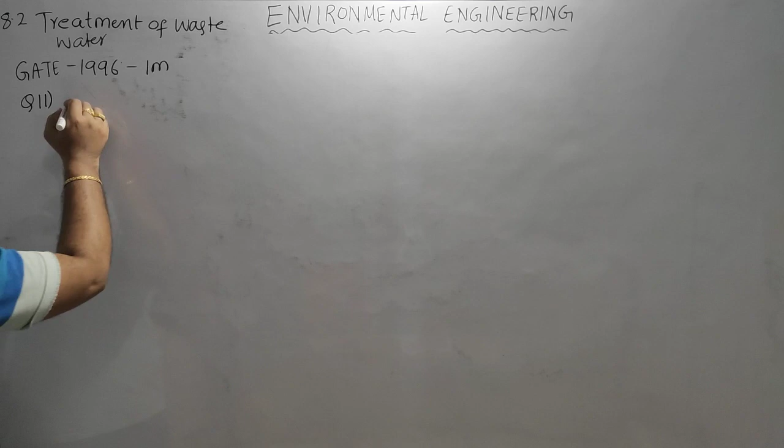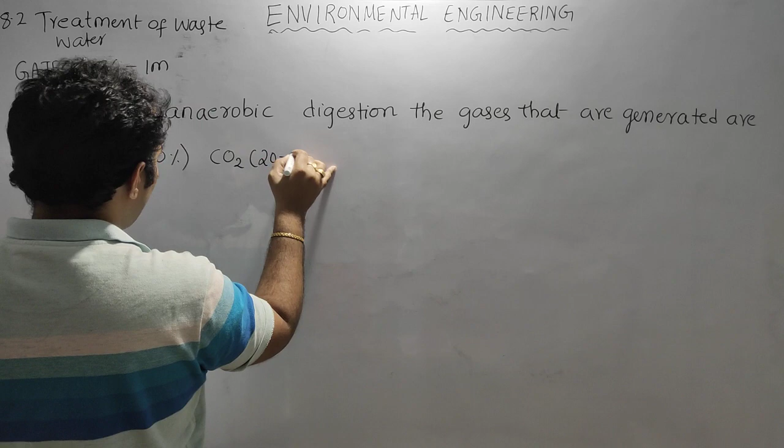Let us discuss question number 11, GATE 1996, 1 mark. The question is: the main constituents of gas generated during the anaerobic digestion of sewage sludge. So during anaerobic digestion, the gases that are generated are CH4, which is 70%, and CO2 20 to 30%, and H2S and other gases in traces. This is what we have learnt.

So from the options: carbon dioxide and methane; methane and ethane - second option is wrong; carbon dioxide and carbon monoxide - also wrong; carbon monoxide and nitrogen - also wrong. So the option is carbon dioxide and methane. That is the answer for question number 11.

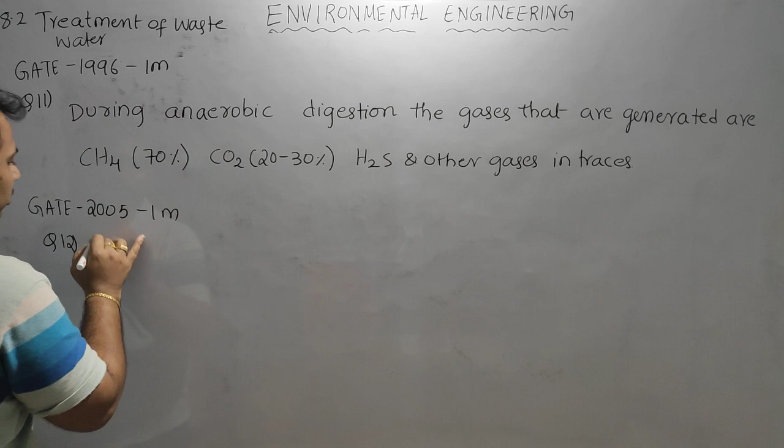Question number 12, GATE 2005, 1 mark question. In aerobic environment, the nitrogenous organic matter will convert into... Here, in aerobic environment, we generally assume we will be having plenty of oxygen available.

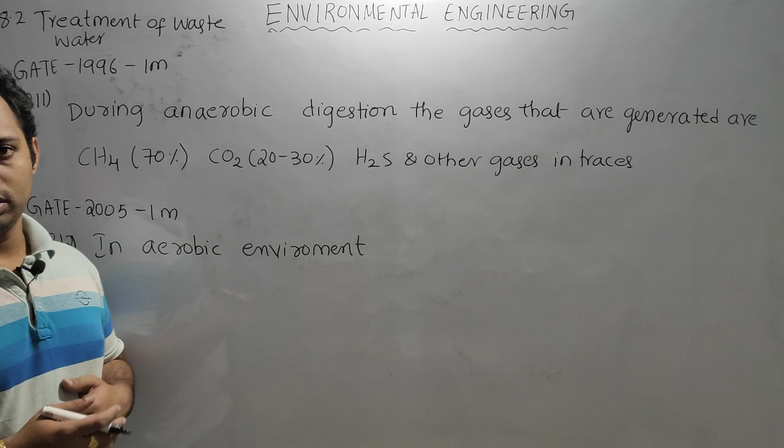So whatever compound forms will be stable compounds. During aerobic decomposition, stable compounds will form, meaning they are completely neutralized - they don't carry any kind of charge. So if you look at the options, except A and C, the rest carry a negatively charged compound in them, so B and D we can eliminate.

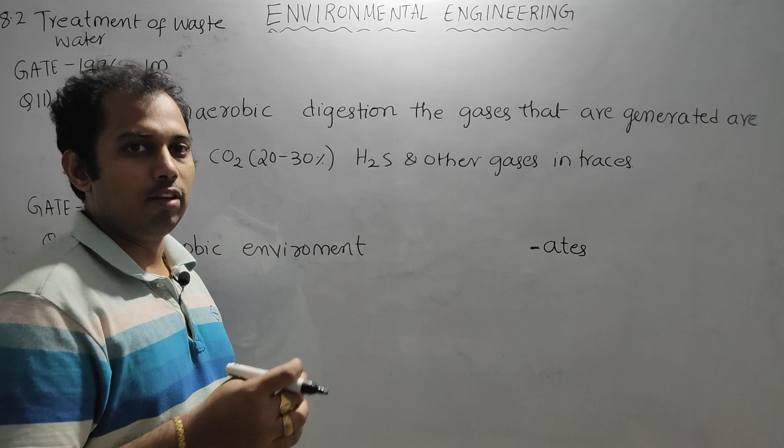Looking at A and C, here oxygen is plenty, so the end products will have an extension called 'ATE'. When we have plenty of oxygen, the compounds will form in terms of ATE: nitrite means oxygen deficiency, nitrate means oxygen is sufficient; sulfite means oxygen is deficient, sulfate means oxygen is sufficient. So ATE means oxygen is plenty. So in the options we look where oxygen is plenty.

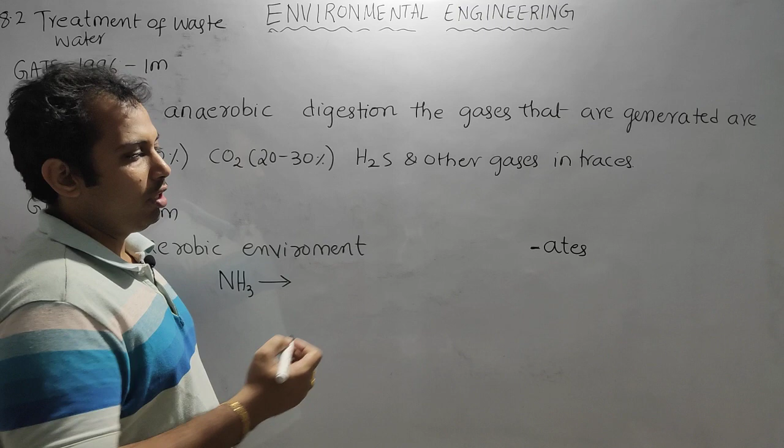If you look at the first option, it is ammonia to nitrate. In an aerobic environment, free ammonia NH3 as the organic matter will be converted into a stable organic matter. That is what we have learned - free ammonia will become albuminoid nitrogen. We discussed albuminoid nitrogen in water supply. It will become albuminoid or organic nitrogen.

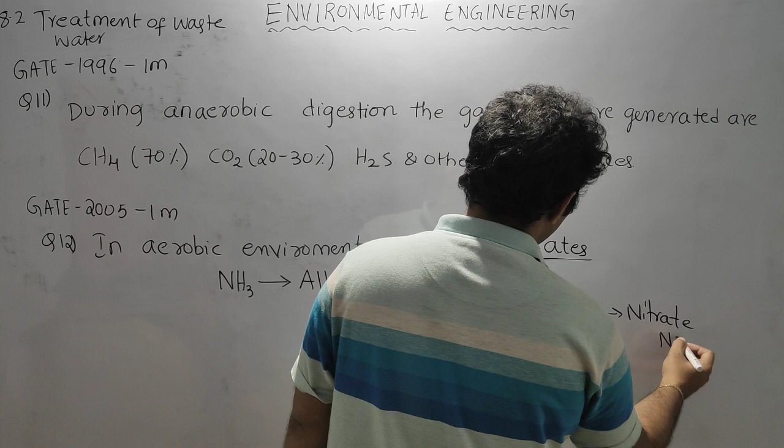And then it will convert into nitrite, and last it will convert into nitrate. So nitrate is nothing but NO3, NO3 is nothing but nitrate. So the answer is: free ammonia will convert into nitrates. That is the answer for question number 12.

Question number 13, GATE 1992, 1 mark question. Trickling filters are used to remove - generally trickling filter is a secondary treatment unit. We use the secondary treatment unit to remove the organic matter, not the suspended solids, not the colloidal solids. Suspended and colloidal solids will be removed in the settling tanks, not in the secondary treatment units. Secondary treatment units generally reduce the organic matter with the help of bacteria or microorganisms.

So that is why in a trickling filter, what we remove is the organic matter. So organic matter is the answer.

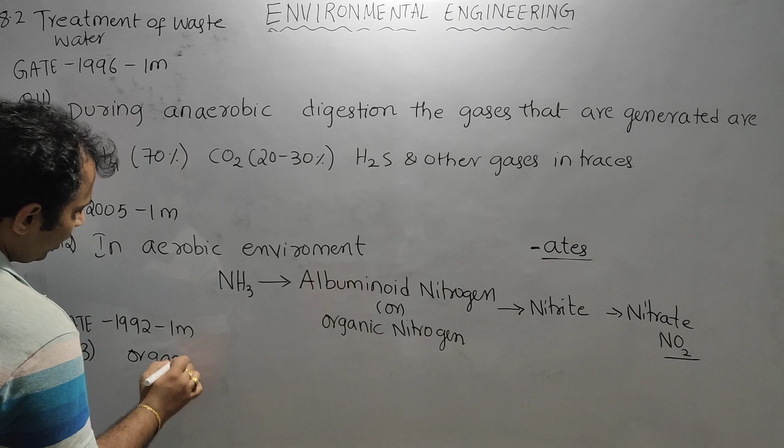Let us discuss the next question. Question number 14, GATE 1995, 1 mark. Let us read the question: a trickling filter is primarily...

First option, straining process to remove the suspended solids from sewage. B, biological oxidation process to remove BOD from sewage. Option C, straining process to remove turbidity. Option D, straining process to remove bacteria from the water.

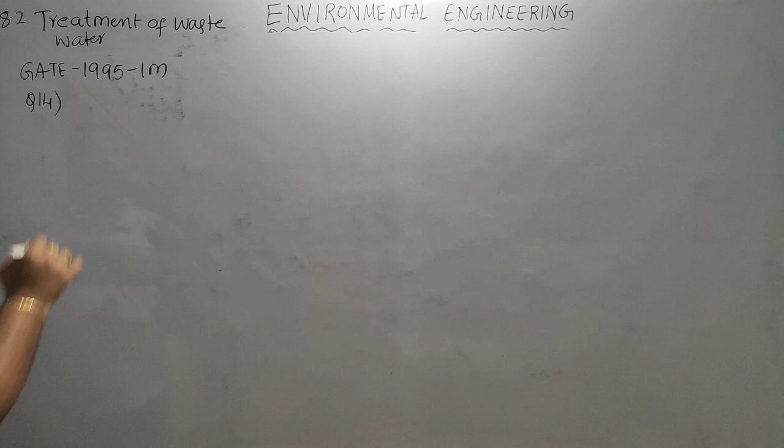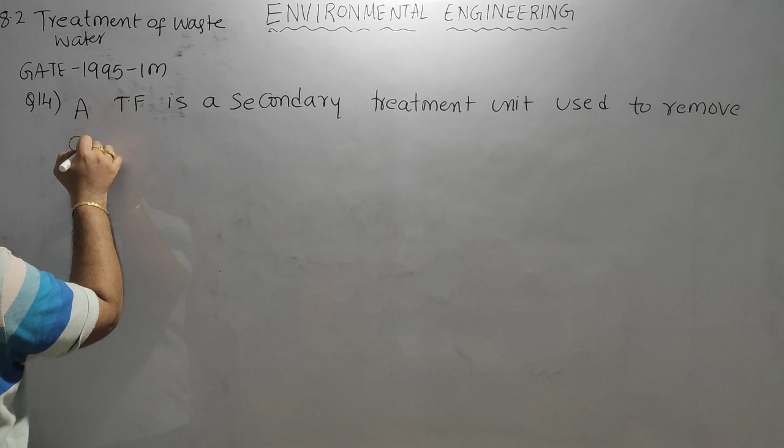So, trickling filter is a secondary treatment unit. A trickling filter is a secondary treatment unit used to remove organic matter, or BOD, with the help of microorganisms or with the help of aerobic bacteria, with the help of aerobic microorganisms - that is the work of the trickling filter.

So it is a biological oxidation process to remove BOD from sewage. That is the answer.

Question number 15, GATE 1996, 1 mark question. The removal of dissolved organic matter occurs in...

Option A, slow sand filter. Option B, trickling filter. Option C, rapid sand filter. Option D, dual media filter.

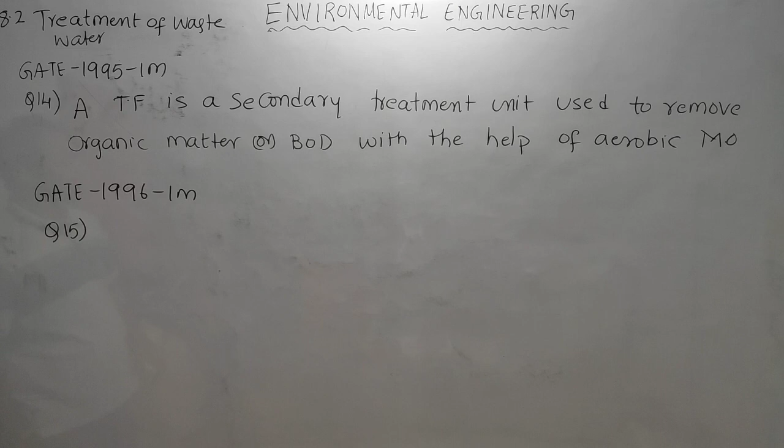See, the three filters we are seeing, slow sand, rapid sand and dual media filter. They are used to remove colloidal and dissolved particles, but the organic matter which is in soluble form, I told you, in secondary treatment...

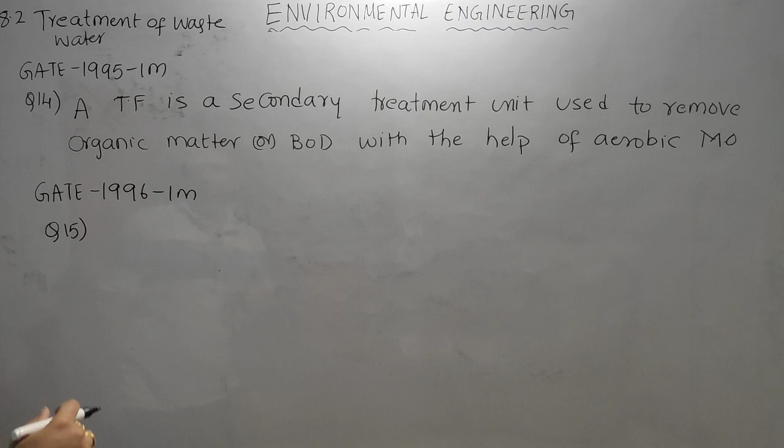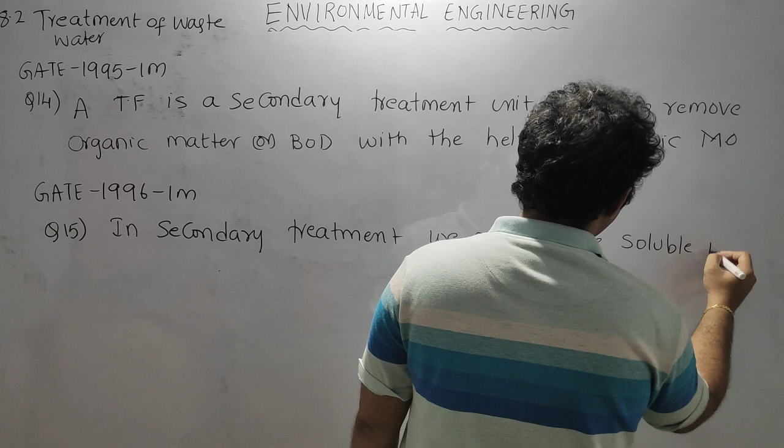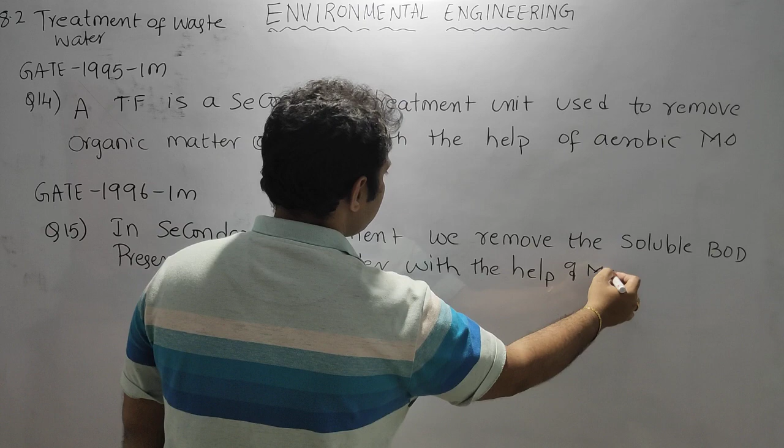In secondary treatment, we remove the soluble, means dissolved, BOD present in wastewater with the help of microorganisms. So generally we remove the soluble BOD. Soluble means dissolved organic matter.

So if you look at the options, all three, slow sand, dual media and rapid sand, they remove colloidal particles, or some kind of dissolved particles which are inorganic in nature. Organic matter they cannot act on directly. They will remove it to some extent, but trickling filter is a device dedicatedly working on removal of organic matter.

So that is question number 15. Question number 16, GATE 2002, 1 mark question.

A trickling filter is designed to remove. Here also the same question. Settleable solids, colloidal solids will be removed in the normal filter or in the sedimentation tanks, but dissolved organic matter is removed in trickling filter.

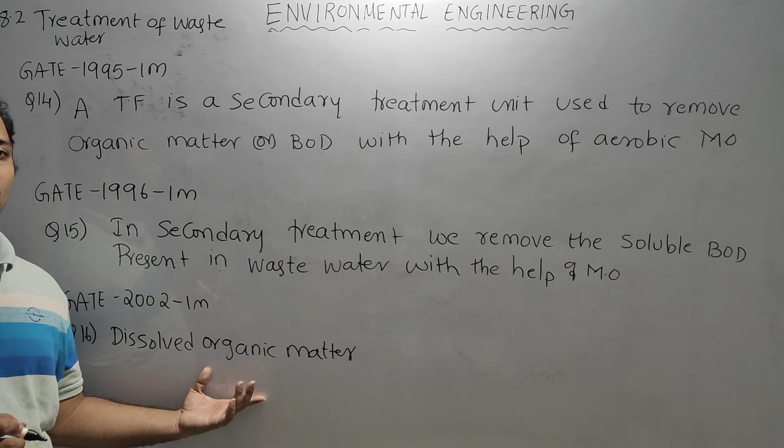So here the same question is repeated. Dissolved organic matter is removed in trickling filters. Not only trickling filter, it may be activated sludge process, sludge digestion tank, or any secondary treatment. All secondary treatment works on reducing the dissolved organic matter. That is the work that happens in secondary treatment of wastewater.

Okay, so let us go to the next question. Question number 17, GATE 2003, 1 mark question.

The question is: which of the following sewage treatment methods has inherent problems of odor, ponding and fly nuisance? These are the operational problems given. What are the three operational problems? Odor, ponding and fly nuisance.

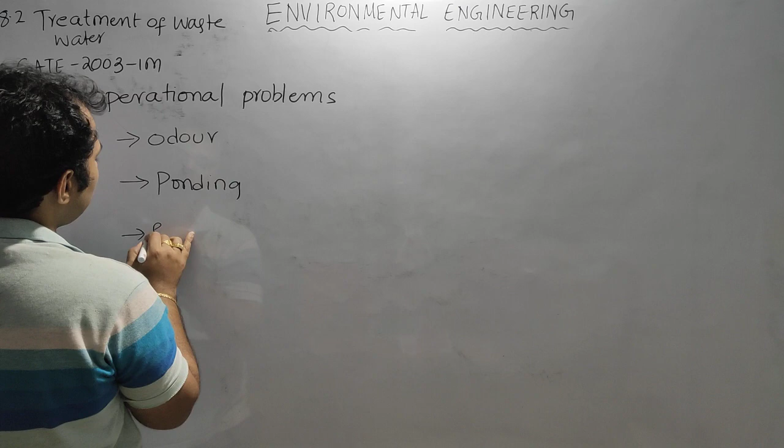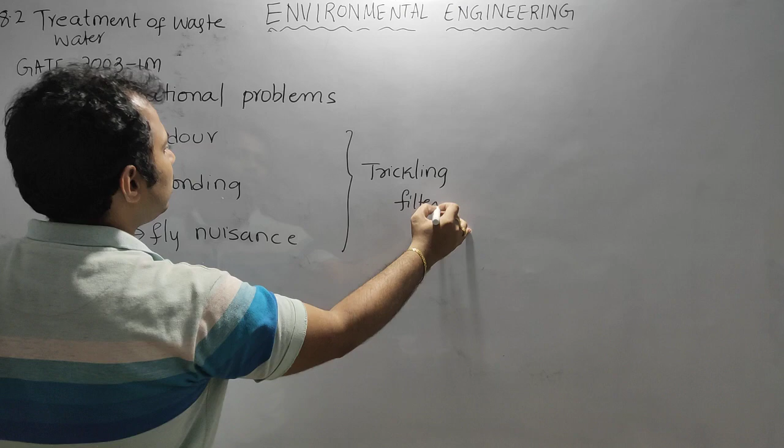So to which treatment unit have we discussed these three operational problems? We have discussed this for trickling filter. So these are the operational problems of trickling filter. So option C is the answer.

Question number 18, GATE 2014, 1 mark, set 1. The question is: the amount of CO2 generated in kg while completely oxidizing 1 kg of CH4 to the end product.

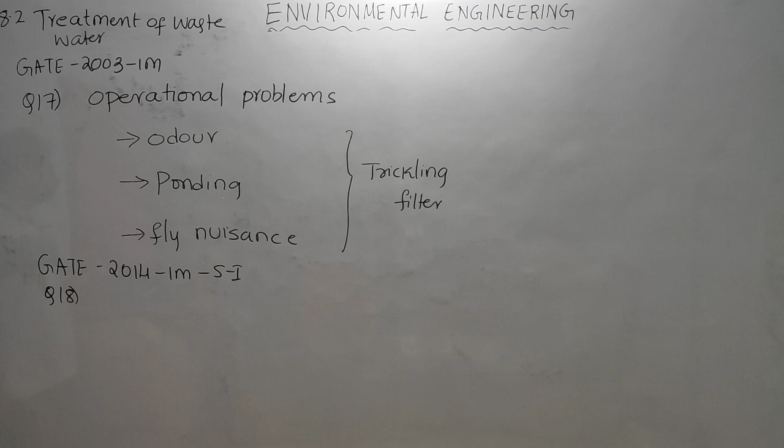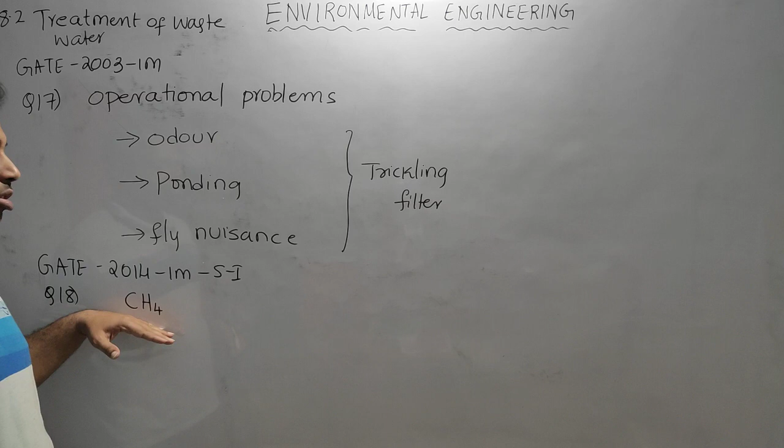So here we are oxidizing CH4 to its end products. Generally, in the absence of oxygen we have generated CH4, so it has oxygen deficiency. That's why it's combustible, because it still needs oxygen, which is why it has energy value. If it were completely filled with oxygen, the energy value would go down. So it has a deficiency of oxygen, it needs oxygen, it is oxidizable. So if you give oxygen to it, it becomes CO2 plus 2H2O.

Here 2 moles of oxygen is needed. Now what is he asking? He is asking what is the total weight of CO2 generated in kg when 1 kg of CH4 is oxidized.

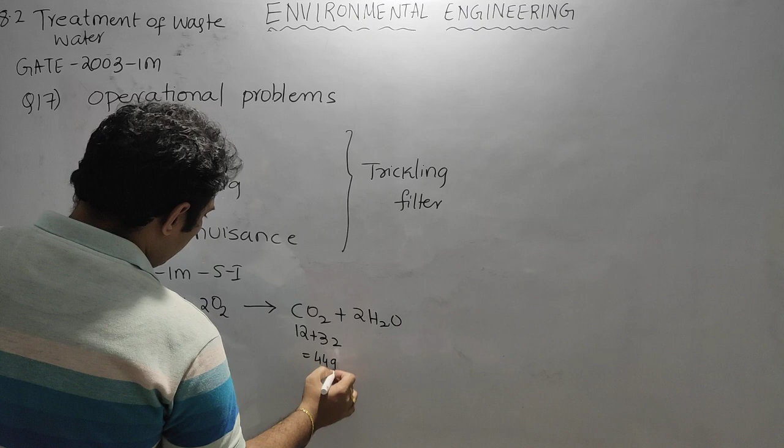What is the molecular weight of CH4? C12 plus H4, that is 16 gram. So 1 mole is 16 gram. 16 gram will give how many grams? 12 plus oxygen 16 into 2, that is 32, so total 44.

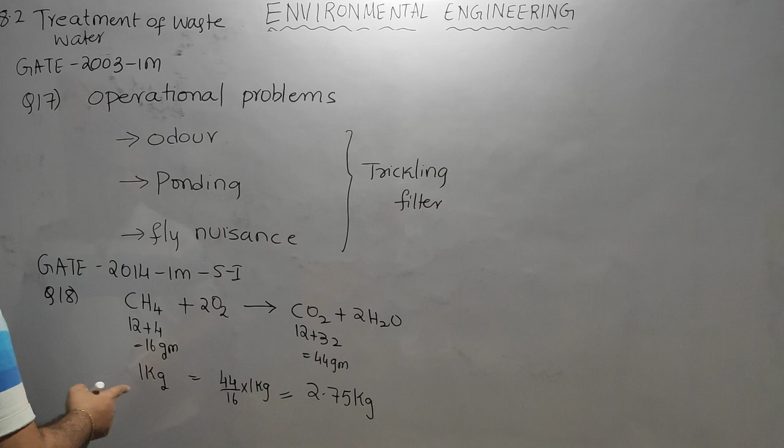So 16 gram is giving 44 gram. So 1 kg will give 44 by 16 into 1 kg. This is the amount of CO2 that will be generated, which is equal to 2.75 kg. For 16 gram we generate 44 gram, for 1 gram 44 by 16, for 1 kg, 44 by 16 into 1 kg, that is 2.75 kg. That is the answer.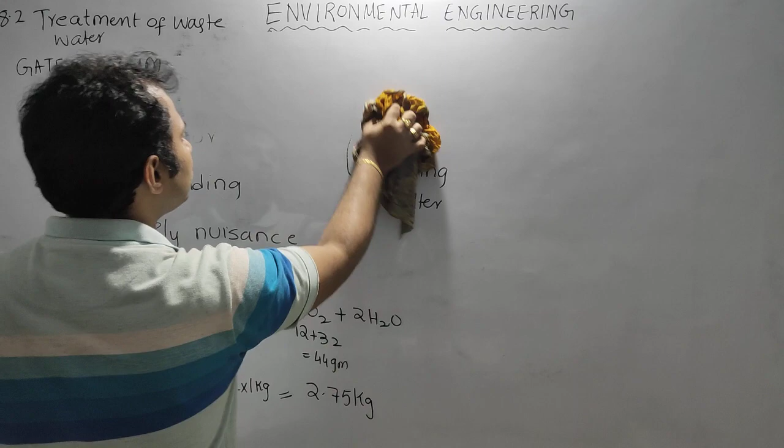Next is question number 19, GATE 2019, 2 marks, set 1. These are all very simple, small questions.

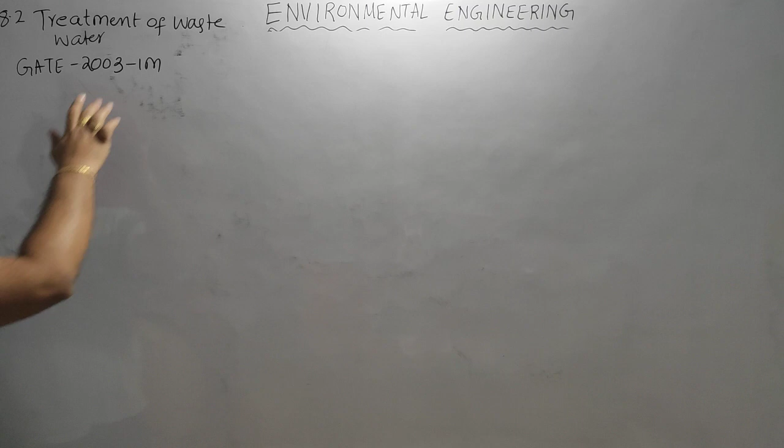GATE 2019, 2 marks, set 1. A 0.8 meter deep bed of a sand filter, length 4 meter and width 3 meter, is made of uniform particles. Diameter is 0.40 mm, specific gravity is 2.65, shape factor is 0.85, with bed porosity 0.4.

The bed has to be backwashed at a flow rate of 3.6 meter cube per minute. During backwashing, the terminal settling velocity of the sand particle is 0.05 meter per second. Find the expanded bed depth in meter. This is actually a question relevant to rapid sand filter, but it came here. Anyway, let us solve this here itself. So what is the given data?

Bed depth, length and width are given. L is equal to 4 meter and width is 3 meter. Depth is 0.8 meter, and the diameter of the particles D is equal to 0.40 mm.

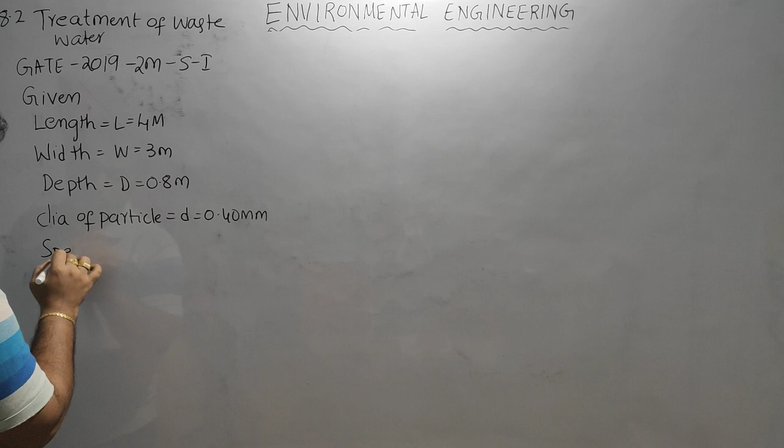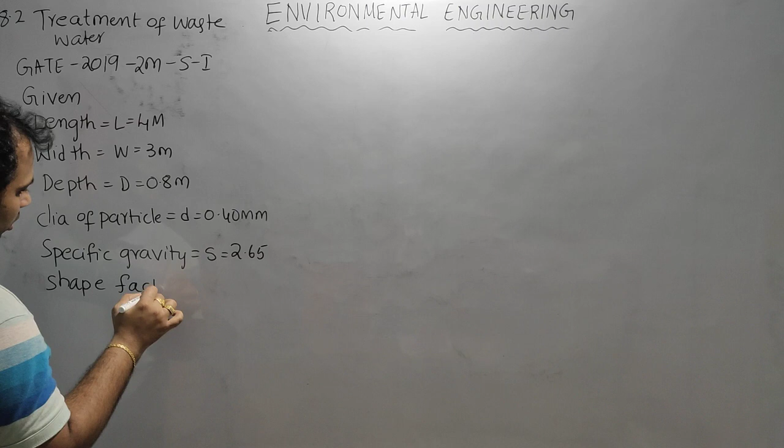D is equal to 0.40 mm. Specific gravity S is equal to 2.65, shape factor phi is equal to 0.85, and bed porosity n is equal to 0.4.

The bed has to be backwashed at a flow rate, so that is the flow rate of backwashing, QB, which is equal to 3.60 meter cube per minute.

During the backwashing, the terminal settling velocity was given. So Vs is equal to 0.05 meter per second. This is Vs.

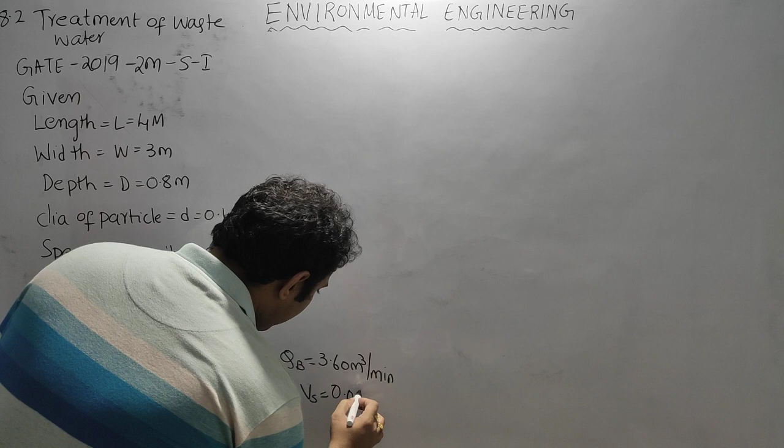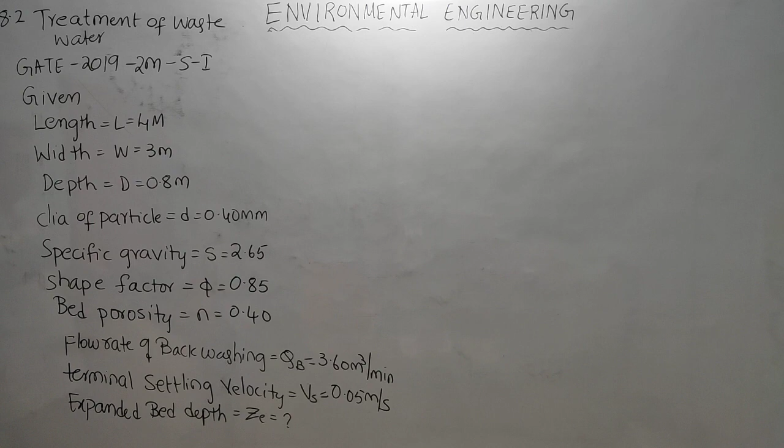Now, what is the expanded bed depth he is asking? Expanded bed depth, that is ZE, is how much? So first of all we need the expanded bed depth. If you know the normal bed depth, we have already learnt this in our rapid sand filter.

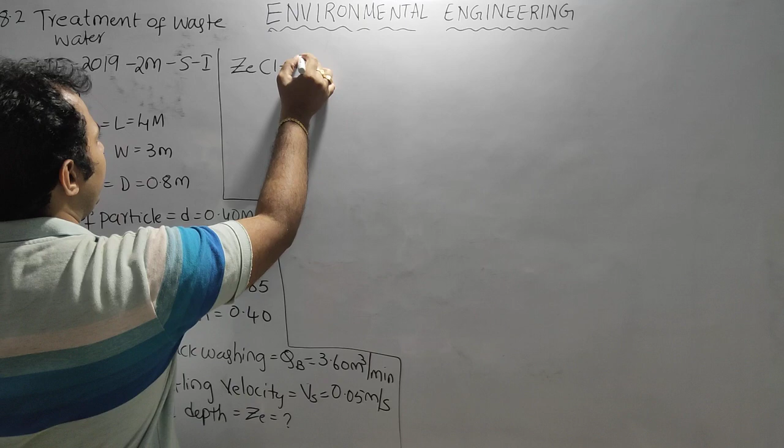There is a relationship we have derived, that is ZE into 1 minus NE is equal to Z into 1 minus N. This relationship we derived in the rapid sand filter topic of water supply engineering. So now he is asking ZE, so ZE is equal to Z into 1 minus N by 1 minus NE.

So if you look at the depth of the bed, the depth of the bed was given, so this is nothing but Z. Porosity is given, so we want only the expanded bed porosity. So now, what is the formula to find the expanded bed porosity?

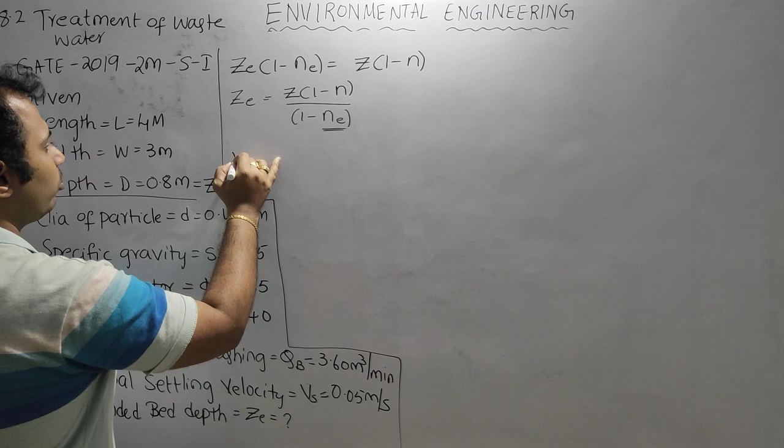There is a formula I have told you. Expanded bed porosity is equal to VB by Vs, whole to the power of 0.22. This formula we have learnt, where Vs is terminal settling velocity, which is already given, equal to 0.05 meter per second.

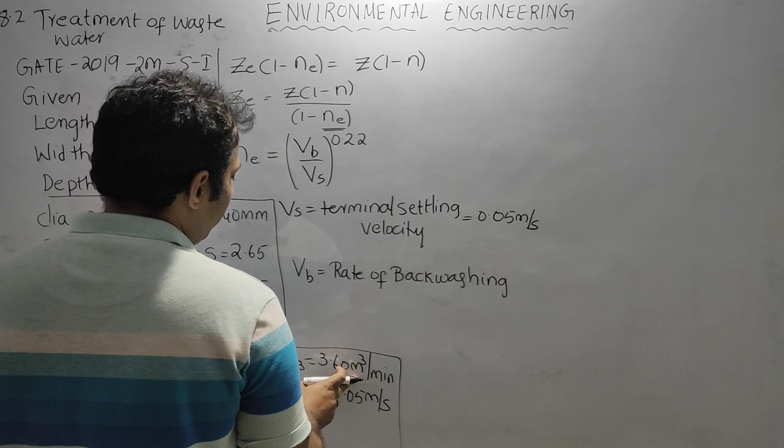So Vs is there, so we want Vb. Vb is nothing but the rate of backwashing. So if I divide it by surface area, then I will get the rate of backwash, or backwashing velocity, or velocity of backwashing.

This velocity of backwashing is nothing but Q by surface area, which is Q by B into L. Q is 3.60 meter cube per minute, converted into seconds by dividing by 60. The area is 4 meter into 3 meter. Meter cancels, and it becomes meter per second.

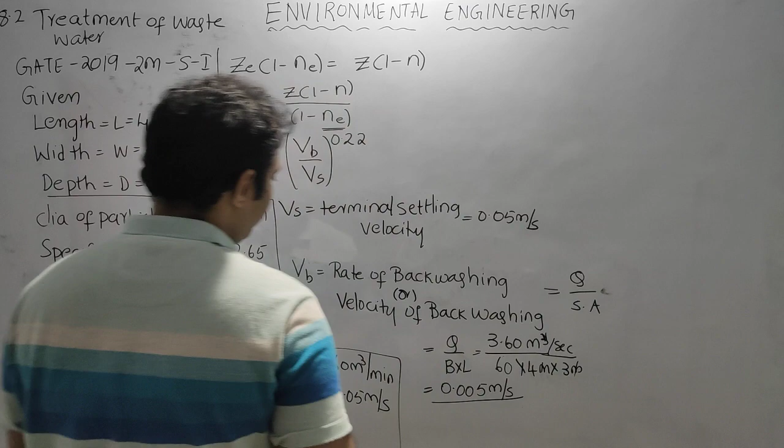So this is the VB value, which we get as 0.005. Now we know VB, that is 0.005, and we know Vs, that is 0.05. Both are in meter per second.

Now we can find the expanded bed porosity. From here we can find it, which is equal to 0.60255. This is the expanded bed porosity.

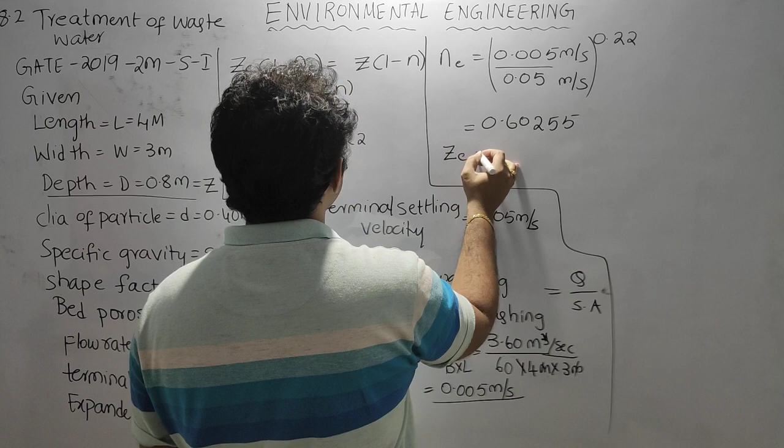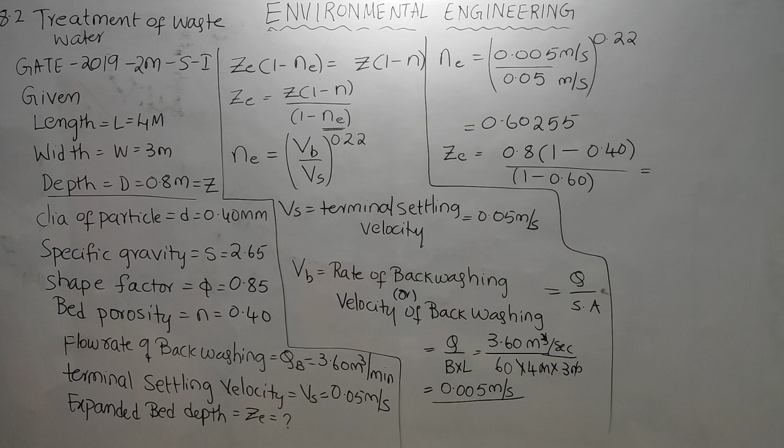Now we know the expanded bed porosity, that means ZE is equal to Z, 0.8, into 1 minus normal porosity 0.40, by 1 minus expanded bed porosity, approximately 0.60. If you calculate that, you get ZE equal to 1.21 meter. This is the expanded bed thickness.

That is what he is asking in question number 19. This is question number 19.

Let us go to the next question, question number 20, Gate 1993.

So lot of data is given which we haven't even used. Sometimes in the question they will give you a lot of unnecessary data. By looking at the data you will feel panic. So this much big question it was, so it is not possible for us to do like that, we will think.

Whenever you feel like it, keep that question to do at the last of the examination when you are having plenty of time. First attempt the questions which you are feeling comfortable, and then go to the question which you feel little tough but you can do.

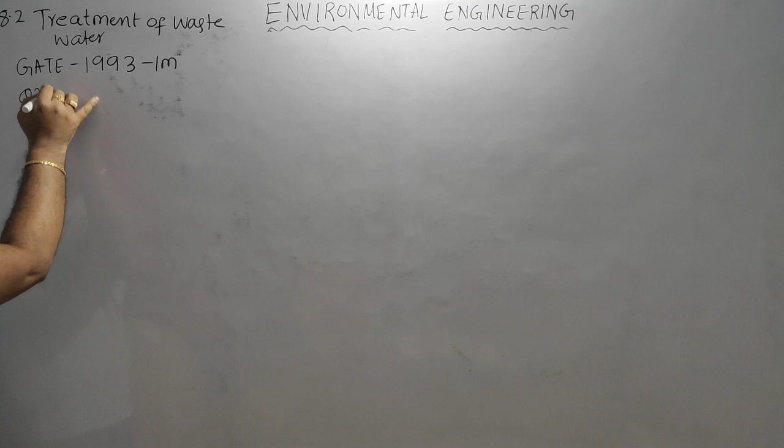So GATE 1993, 1 mark, question number 20. Activated sludge is - activated sludge means what? I have already told you in the class. Aerated sludge in the aeration unit? No, we take the activated sludge from the secondary sedimentation tank.

Second option is sludge settled in the humus tank, that is also wrong. Third option, sludge in the secondary tank after aeration and rich in microbial masses - very correct. So this is exactly what we have explained. In the secondary sedimentation tank, the biomass will be more, the number of microorganisms will be more present. So that is called activated sludge, which we take back into the aeration tank. That is activated sludge, so option number C, sludge in the secondary tank after aeration.

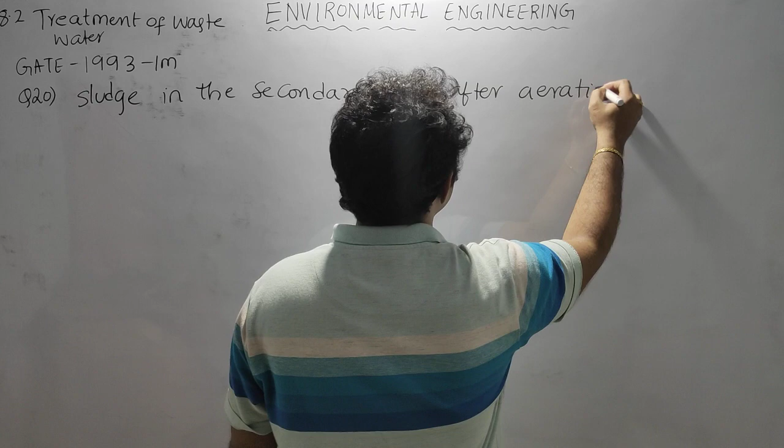Okay, that is the answer. Sludge in the secondary tank after aeration, which is rich in microbial concentration. This is the answer. Okay, so that is question number 20.

Question number 21, GATE 1999, 1 mark question. See here, chlorine is sometimes used in the sewage treatment - to avoid flocculation, to increase biological activity of bacteria, to avoid bulking of activated sludge, or to help in grease separation.

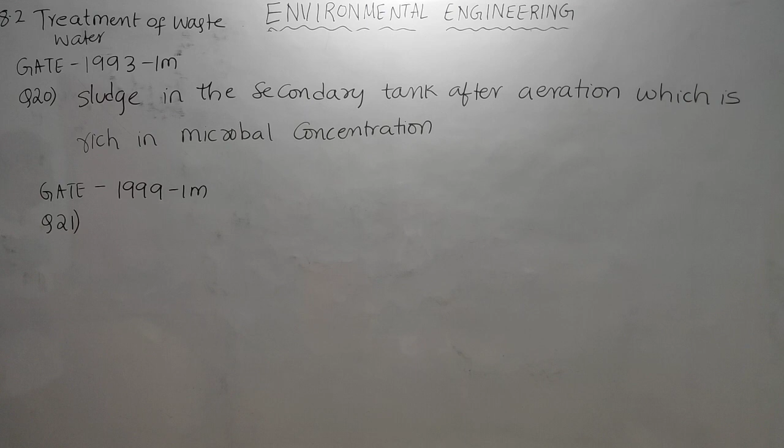See, where we added chlorine - if you see in the bulking of the sludge, chlorine is also one of the remedial measures. Chlorination is also one of the remedial measures in order to reduce the bulking. So chlorinating or chlorination is a remedy to prevent bulking of the sludge. Because why bulking is happening?

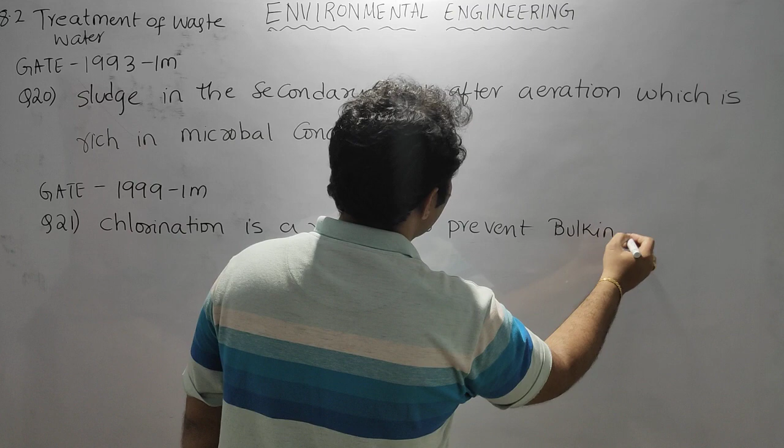Because more microorganisms, less food is there - the nitrogenous matter is being consumed by the organisms because no food is there. So they will consume the nitrogenous matter within the system. So if you are reducing the microorganism, then the bulking you can control. How to reduce the microorganism? By killing it. So by chlorinating it, we can kill the microorganism, we can reduce the bulking of the sludge. So that is why chlorination is a remedy for bulking of the sludge.

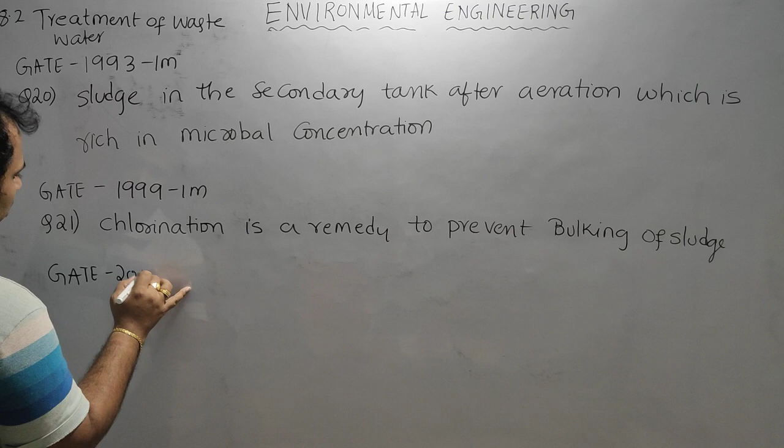Okay, question number 22, GATE 2000, 1 mark. These are very simple questions, very scoring questions for GATE examination. Critical factors for the activated sludge treatment process. Option A, maximum hourly flow rate. Option B, maximum and minimum flow rate. Option C, maximum hourly flow rate and maximum daily organic load.

Option D, maximum hourly flow rate and minimum daily organic loading. So which are the important critical factors? See here, whenever we design the wastewater treatment units, during the design we assume that the influent which is coming into the secondary treatment unit is directly coming from the primary sedimentation tank. But into the primary sedimentation tank, which flow will enter? The dry weather flow will enter.

So generally, if you take the dry weather flow, peak dry weather flow, we are having different dry weather flows - maximum daily, minimum daily, maximum hourly, minimum hourly dry weather flow. I told you for which flow we design, generally we design the sewers. So what flow are we designing the sewers for? From the sewers, the sewage will enter into the primary, secondary and tertiary treatment units.

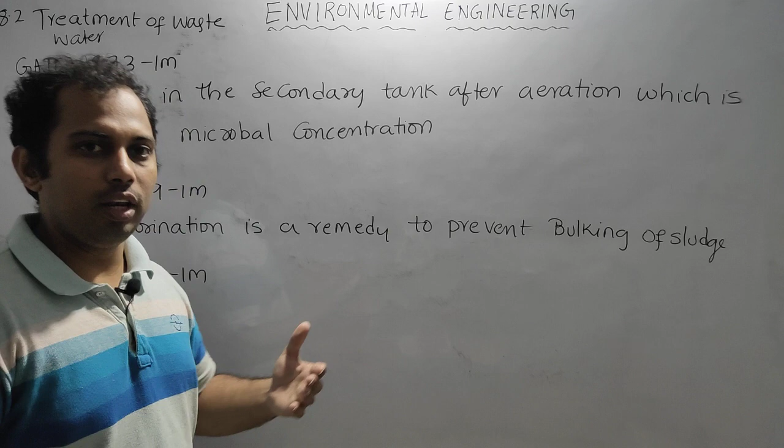So that means whatever the sewage that is coming, the maximum hourly is the worst case, so critical. So when will the system be critical? When the maximum sewage is entering into the system, then the system is critical. So maximum sewage means, among all the different maximums, maximum hourly is the peak.

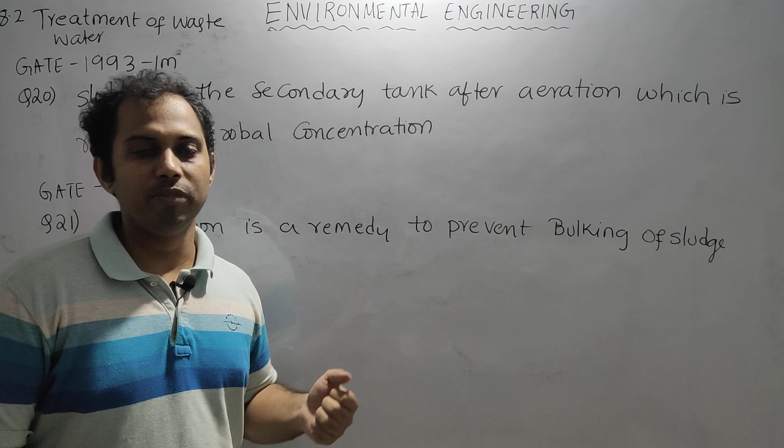Okay, maximum daily - beyond maximum daily, maximum hourly will be there. So maximum hourly is the largest possible sewage that can enter into the treatment unit. So that is a critical factor. And another critical factor is organic loading. So when the organic loading is minimum, how will it become critical? When the organic loading is maximum, then it will cause criticality in the system.

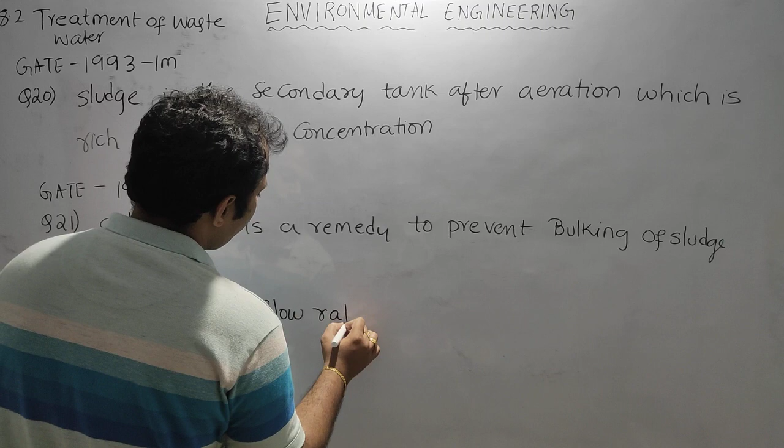So maximum hourly flow and maximum daily organic load are the critical factors for the activated sludge treatment process. So that is the answer for the question - maximum hourly flow rate and maximum daily organic load. So these are the critical factors in the activated sludge treatment.

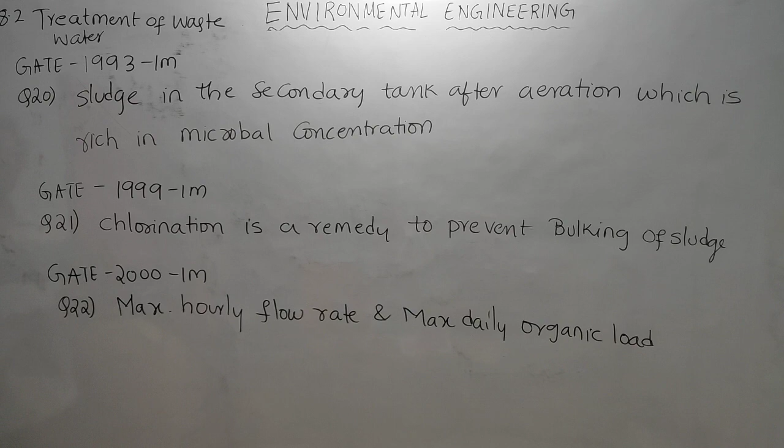Settling test on a sample drawn - question number 23, it is a 2 marks question. Let us see, question number 23.

Question number 23. GATE 2003, 2 marks question.

Settling test on a sample drawn from an aeration tank liquor of ASP, MLSS is 2800 mg per liter, was carried out with 1 liter sample. The test yielded a settled volume of 200 ml.

The sludge volume index - very simple question, though I thought it is a very big question. So what is the given data? MLSS concentration, X is equal to 2800 mg per liter.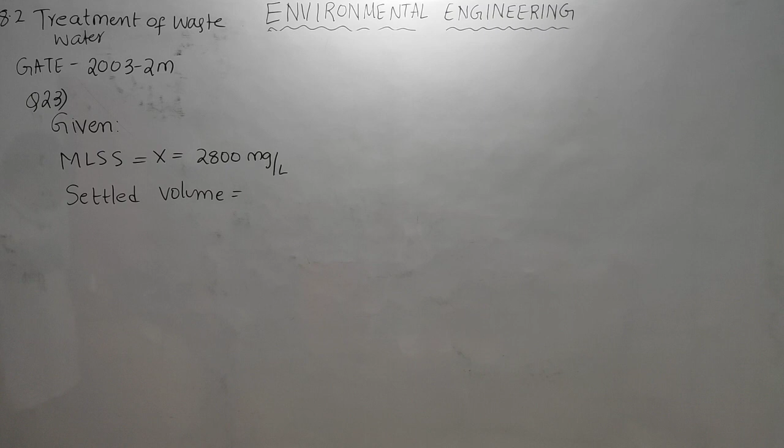It is carried out on 1 liter sample. The test yielded a settled volume of 200 ml. Then what is the sludge volume index? Sludge volume index is nothing but we have a formula for sludge volume index using the MLSS.

See here, what is the unit of sludge volume index? ml per gram is the unit of the sludge volume index.

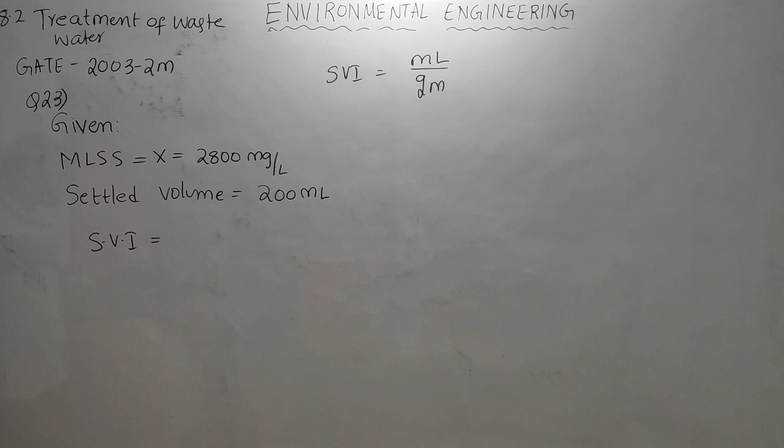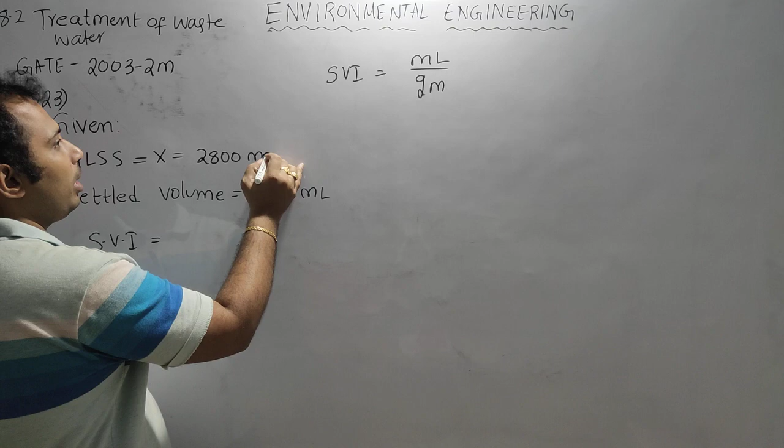So we have taken 1 liter. In 1 liter, what is the milligram present? MLSS is 2800 mg per liter. If I am taking 1 liter of MLSS, what is the weight of MLSS? 2800 milligram for 1 liter solution. So this is the weight for 1 liter, this is the volume for 1 liter.

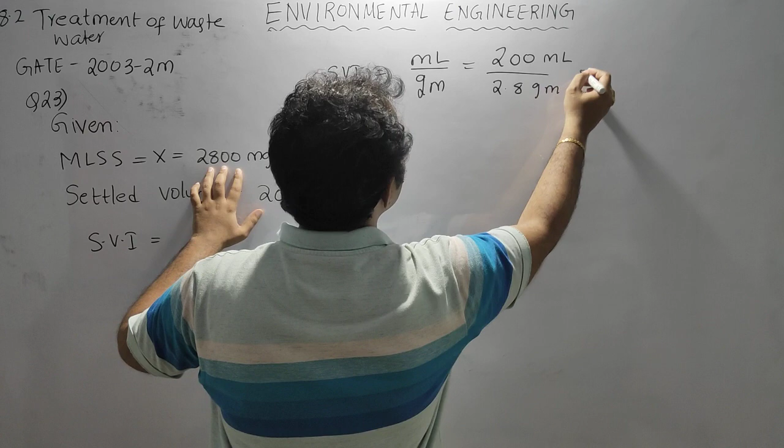Weight, volume by weight - that means 200 is the volume in ml. Weight I need to take it in grams, that means 2.8 gram. So this is the answer: 200 by 2.8 gram, 200 ml by mg per liter giving ml per gram. So what is the answer of this?

What is the formula of sludge volume index? Sludge volume index is equal to 71.4. So the solution given in your solution sheet is wrong. This is 71.4 ml per gram. This is the answer, sludge volume index.

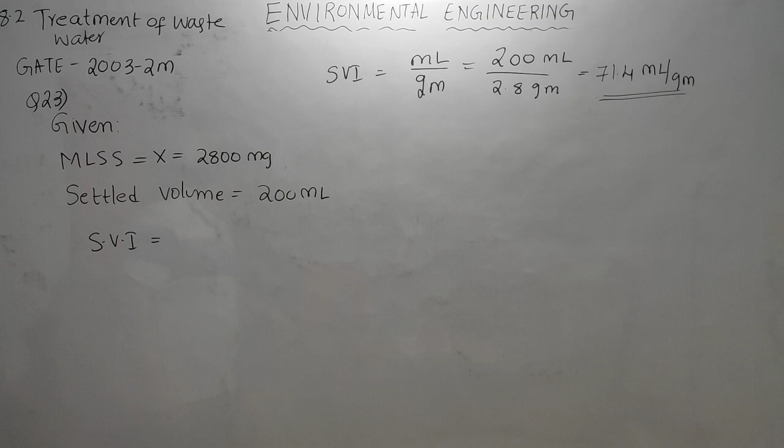So let us go to the next question, number 24. GATE 2004, 2 marks question. So let us read the question.

An analysis for determination of solids in the returned sludge of activated sludge process was done as follows. A crucible was dried to a constant mass of 62.485 gram. 75 ml of well mixed sample was taken in the crucible, and the crucible with the sample was dried to a constant mass of 65.020 gram in a drying oven at 104 degree. The crucible with the dried sample was placed in a muffle furnace at 600 degrees centigrade for an hour, and after cooling, the mass of the crucible with the residues is 63.145 gram.

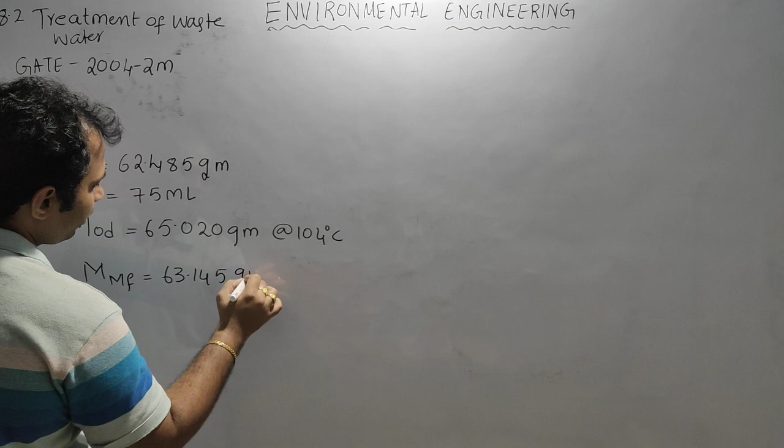So what is he asking? The organic fraction of solids in mg per liter. In mg per liter is how much? See, generally when we are heating it at a temperature of 600 degrees,

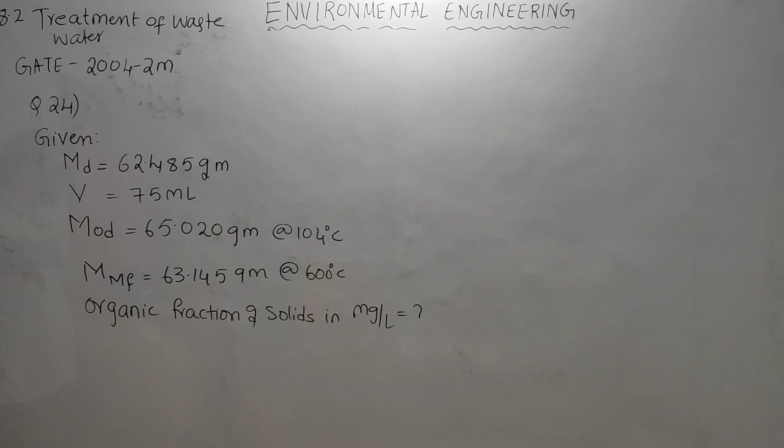then all the organic matter will leave the system. So this is the tare weight, the empty weight of whatever pan you have taken - that is the crucible. So this is the empty weight, and this is with the sample oven dry weight at 104 degree, with the sample under muffle furnace at 600 degrees.

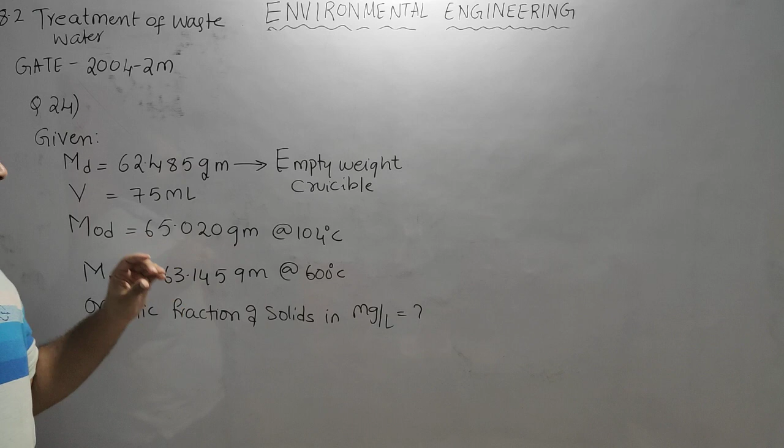So the difference - when we are heating it at a temperature of 600 degree, all the organic matter will go away from the material. So this difference is nothing but the organic fraction, in gram. And what is the volume of it? That is 75 ml. So this difference in gram by volume is nothing but the concentration.

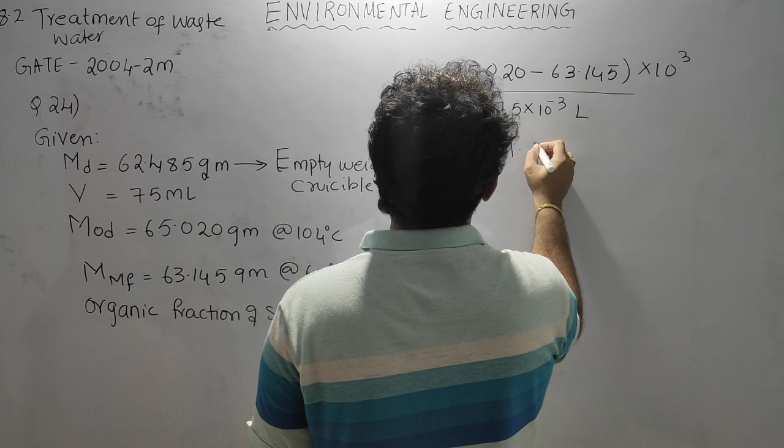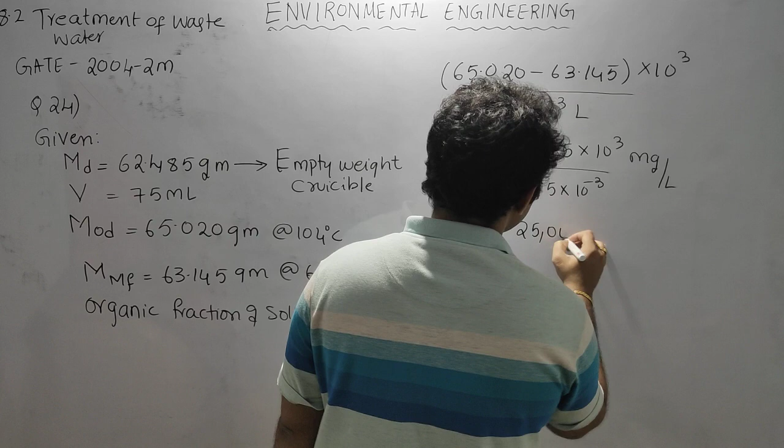So 65.020 minus 63.145 into 10 to the power of 3, that is milligram, by 75 ml into 10 to the power of minus 3 liter. So this is the concentration, that is 1.875 into 10 to the power of 3 by 75 into 10 to the power of minus 3. This is milligram and this is liter. So that is coming around 25,000 milligram per liter - this is the answer.